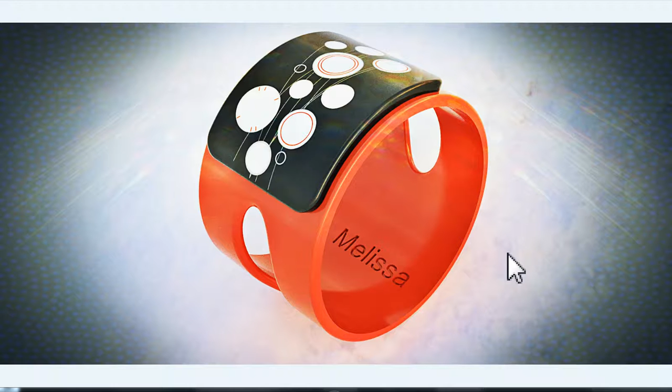Hi, Raid Johnson here. Now it's time to make a prototype of our smartwatch by 3D printing. In Fusion 360, I can start the 3D printing process by coming up to my File menu, clicking that once to drop it down, and finding the 3D print option, File 3D Print.

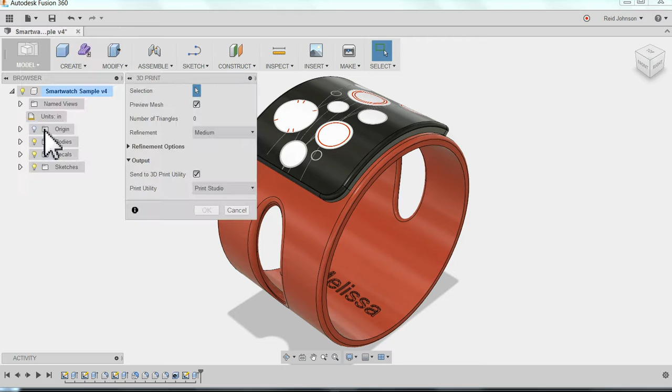This first step is a little bit tricky. It wants to know what do you want to 3D print. Asks me to select it. I can hover over just the watch face or just the watch body, or if I hover over the center, you'll notice the entire thing highlights. It really depends on where I have my mouse as to what is highlighting.

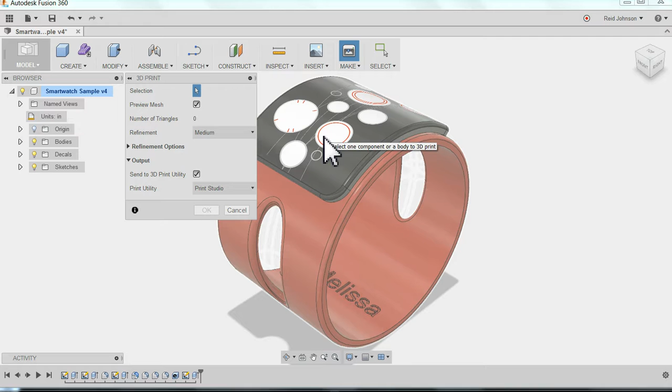So simply move your mouse around till both are highlighted. You want to 3D print the entire thing. I'll click one time and the entire model will be ready for 3D printing. I can preview the mesh or not. If the mesh is not previewed, the model will simply turn blue. If the mesh is previewed, I'll start to see the triangulation.

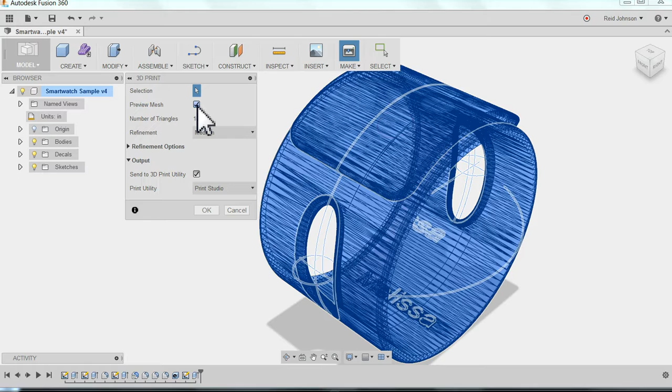What happens when you 3D print is curved surfaces are all converted into a series of small flat faces to 3D print. If I zoom in really close here, I notice these are all a series of flat faces, triangle shaped, all the way through and around every curve.

So my next step is to just look through this. Medium refinement is just fine. You'll notice you can go high or low or custom options of refinement, but for right now, medium is perfect. I can send this to a 3D print utility, such as Autodesk Print Studio, which is really great to send this off to 3D print.

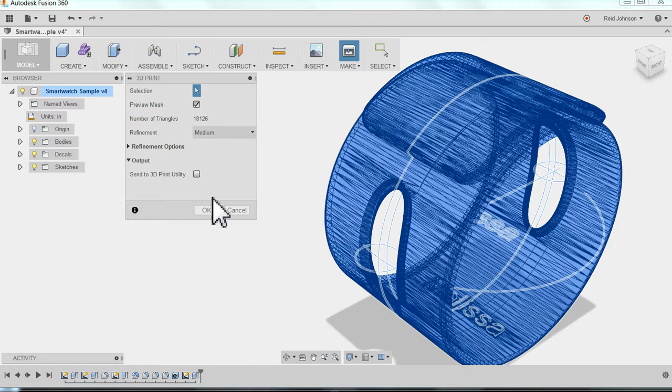But for now, if we just want the file that we use for 3D printing, I can uncheck this box, make sure it's unchecked, and then say OK. And that's going to let me save this out as an STL file. I can call it Smartwatch Print with a name and then hit save. That's going to save that STL file out for 3D printing.